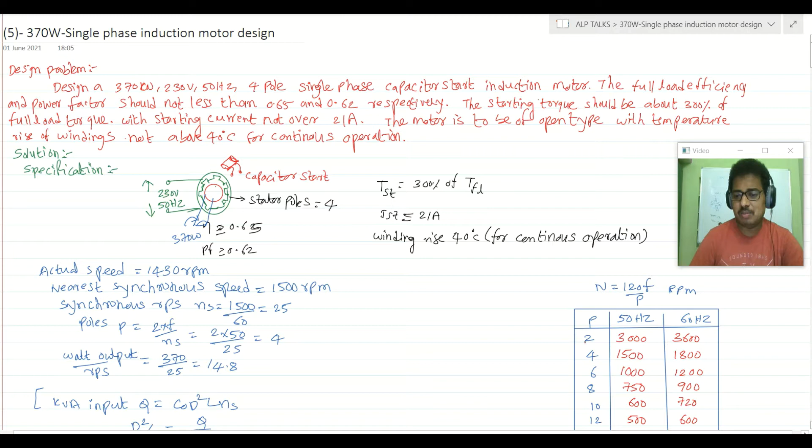For example, if it is a 2-pole machine at 50 hertz, we will have 3000 RPM, 1500 RPM, 1000 RPM, 750 RPM. This table goes up to 20 poles. For a 20 pole machine, this is 300 RPM for 50 hertz and 360 RPM for 60 hertz. This is the template for different speeds versus poles combination.

Here, for example, the actual speed in this case is 1430 RPM. So let's choose the nearest RPM, which is 1500 RPM for 50 hertz and for this 4-pole machine. So this is the actual speed, and the nearest synchronous speed is 1500 RPM.

So let's calculate RPS, synchronous speed in rotations per second. We will say small ns equals 1500 by 60, that will be 25. Now let's calculate number of poles. Number of poles will be 4 in this case.

So we are going to calculate one factor, the ratio of output by speed. For 370 watts output, if it is rotating at 25 RPS, then the factor is 14.8.

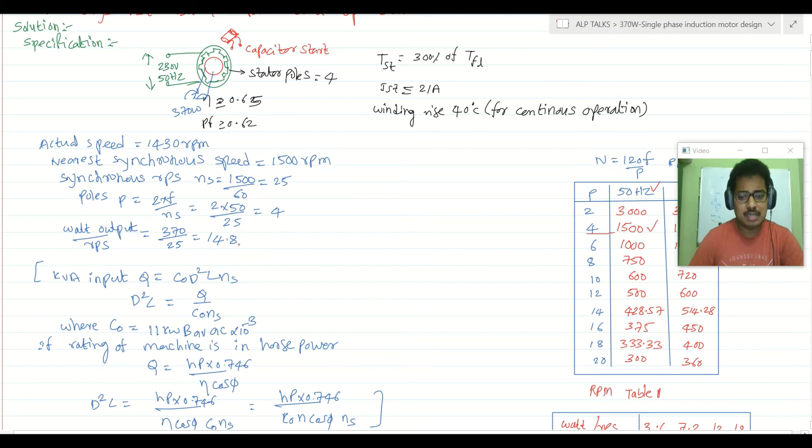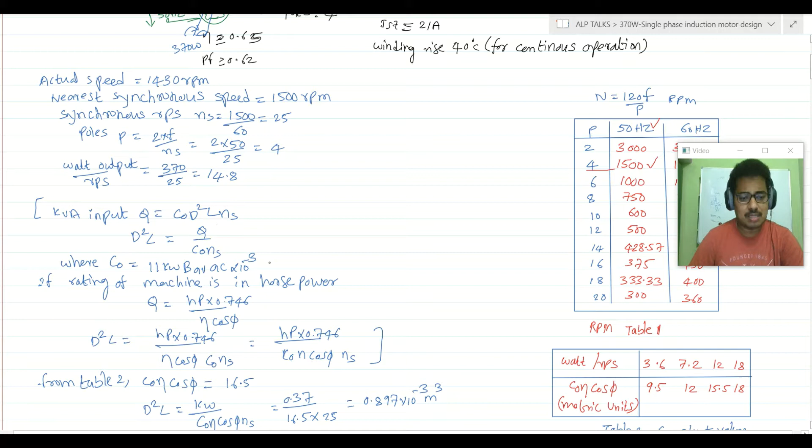So for kVA input, we have some basic formula. I am just deriving one formula here, that is Q is nothing but C naught D square L into Ns. So let's calculate D square L, Q by C naught Ns.

Here C naught is nothing but 11 kW B average AC into 10 power minus 3. This is the basic formula we have. If rating of machine is given in horsepower, we should consider Q as horsepower into 0.746 by efficiency into cos phi.

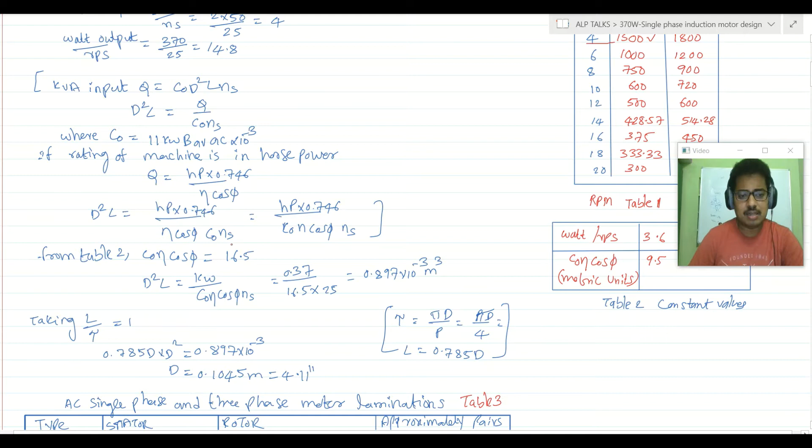So let's substitute everything in D square L. D square L equal to HP into 0.746 by eta cos phi C naught Ns. So this is the thing.

So we have one table here, table 2. In this table, watts per RPS, if it is 3.6, the factor is 9.5; 7.2 means 12; 12 means 15.5; 18 means 18. This is one table we have.

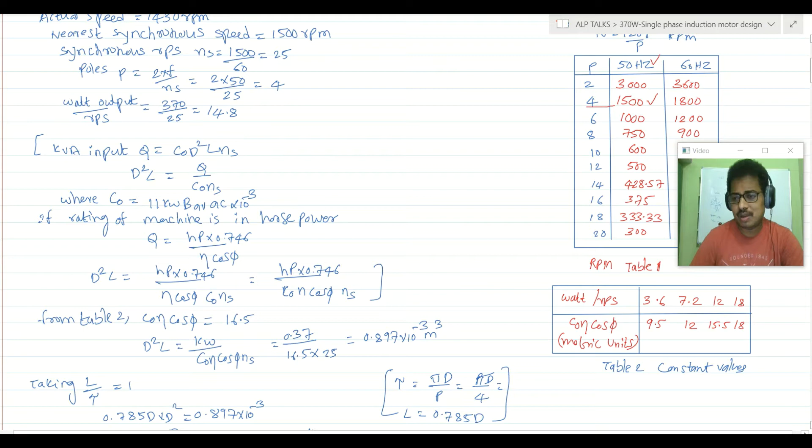From that table, the C naught efficiency cos phi value we got as 16.5. So D square L is nothing but, let's calculate this. We know 0.37, just substitute 16.5, RPS is 25. So we got this value.

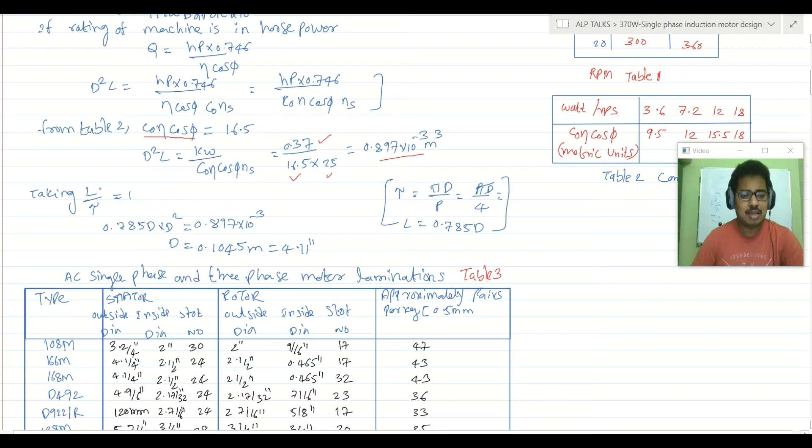So let's take length by the pole pitch tau as 1. So we can get D as 0.1045 meter, that is 4.11 inch.

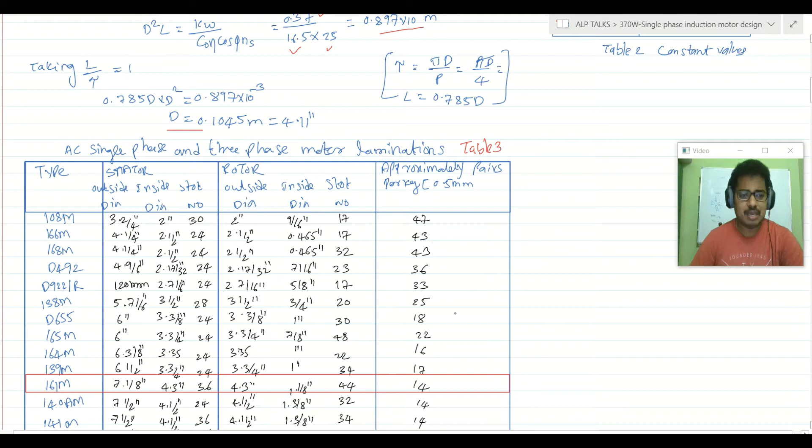So we got here 4.11. In this table, the closest one is this one, 161M. So we chose this. For this, 4.3 is the inside dia and 7, 1 by 8 inch, everything will be in imperial units in inches. This is outer dia. We have 36 slots in the stator, and rotor is also similar way.

We just ignored the air gap here, but of course air gap is there. That will be very small, 0.5 mm, something like that. So for consideration, we just took the same value for rotor also.

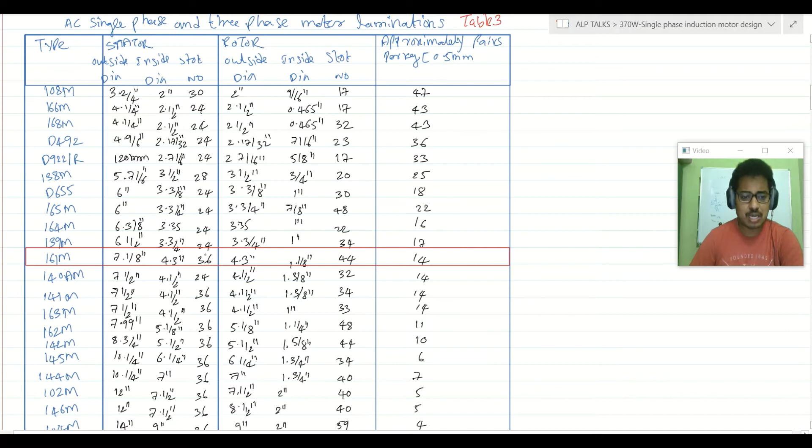Here inside dia is 1 by 8 and we have more slots here in the rotor, 44 slots. So 36 and 44 are the slots now, and 14 is the weight. So from this table we chose the 4.3 inch stator inner diameter, that is 161M, that is the model now. So what is the length of the core?

What is the stator bore? 4.3 inches is nothing but 109 mm if we convert into mm. Just substitute in the above equation. L is nothing but 75 mm. So we got 109 mm diameter of stator, and this is of 75 mm length. So this is a very small AC motor.

We have some standard template for the stator laminations also, you can see it here. The entire stator is 0.75 inch height and 0.158 inch width, and 4.3 is the diameter. So this is what the details show.

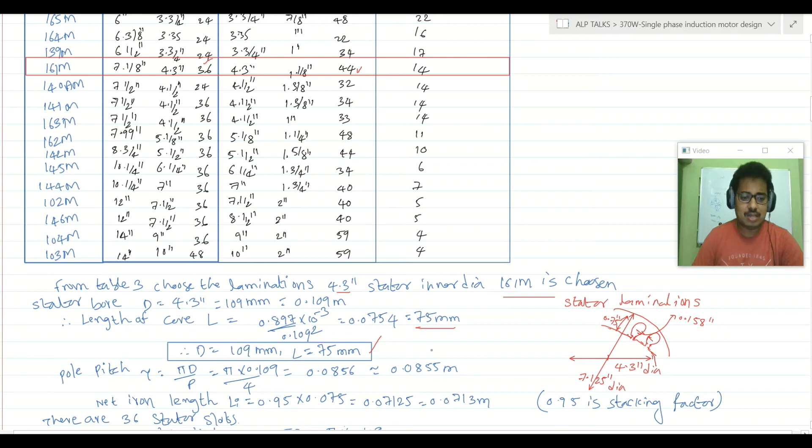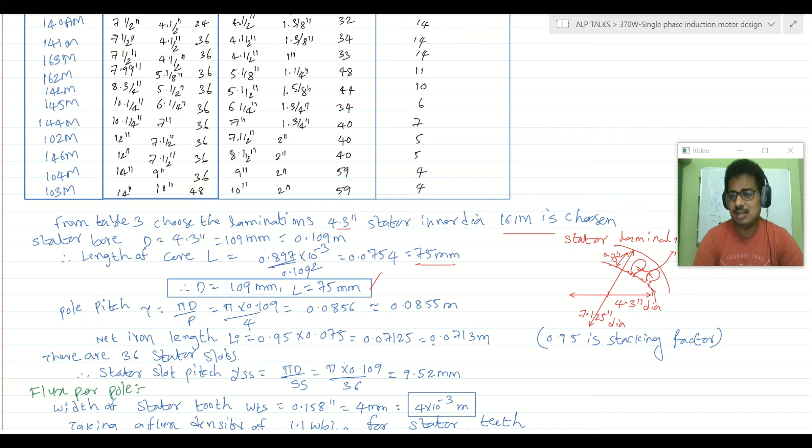In small machines, the approach is different compared to bigger machines. In bigger motors, for example 100 kilowatt range motors, we start everything with D and L, which we calculate ourselves. We don't follow a standard template there. But here, calculation of slots and all is very difficult. Up to D and L is okay, but after that we can't calculate small slot dimensions. So what we use is a standard available nearest frame, motor frame, stator frame and rotor frame.

Based on our rating, for example 370 watts, we check how much current there is, how many turns are required, and whether we are able to provide the number of turns and the conductor cross section in the slot or not. That's what we should do for the smaller machines.

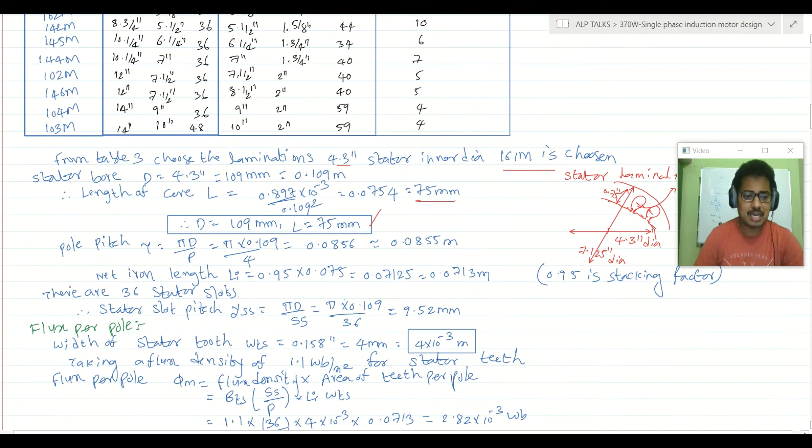Let's calculate pole pitch here. Tau is nothing but pi into diameter by number of poles, pi into 109 by 4. So we got 0.0855. This is the pole pitch, and net iron length - we chose the stacking factor as 0.95, so we get 0.0713, that is nothing but 71 mm.

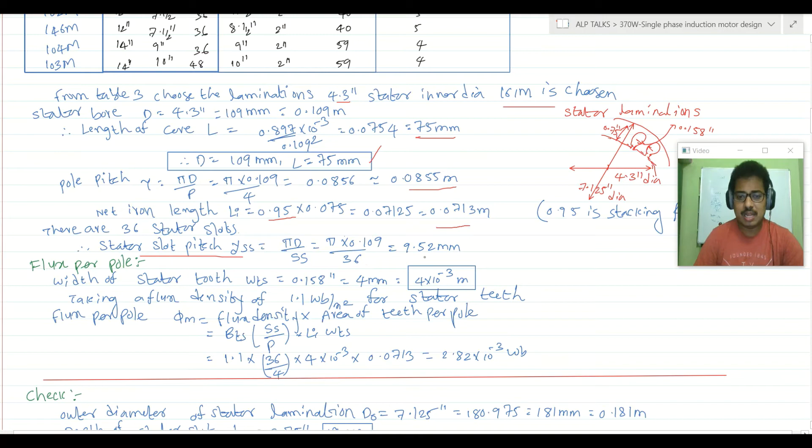There are 36 slots in the stator that we already considered. So stator slot pitch is nothing but pi d by Ss, pi into 109 by 36, we got 9.52 mm.

Let's calculate flux per pole, one of the main parameters. Width of stator tooth is already 4 mm from that existing template. Let's take flux density in the stator teeth as 1.1. So let's calculate flux now - flux is nothing but B into A, flux density into area. Flux density we chose as 1.1.

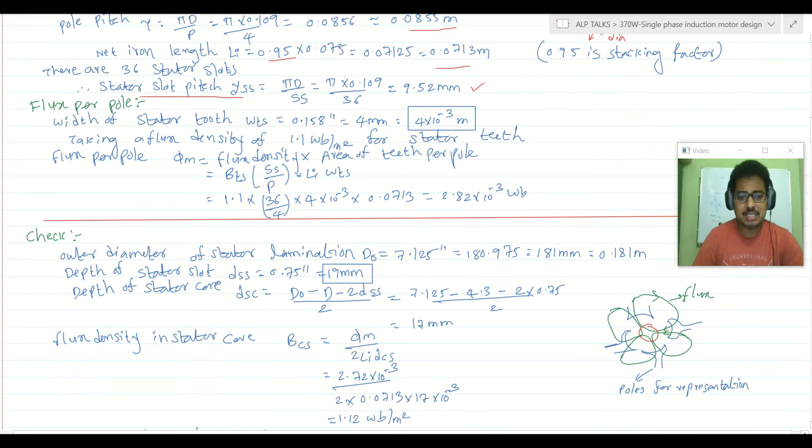The area is nothing but 36, which is the total stator slots, and number of poles 4. 36 by 4 gives total slots per pole, and each slot width is 4 into 10 power minus 3, and this is the net iron length for us. So we got 2.82 milliweber as the flux now.

Let's check whether this flux is okay or not. So this green color one - the red color inside is the rotor, and this one is the stator. The flux pattern is like this, you can see it here. So 4 loops are there.

Outer diameter of stator lamination is nothing but D0, 7.125 inch, that is 181 mm, and depth of stator is 0.75, that is 19 mm. The depth of stator core DSC we can use this formula, and we will get this value as 17 mm.

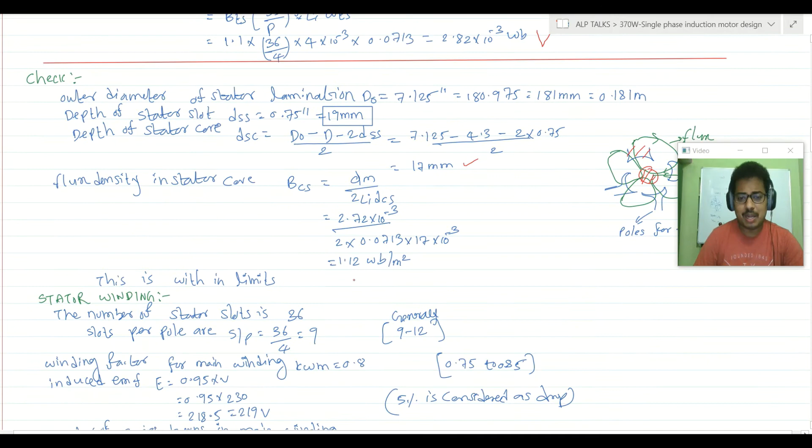Now let's calculate flux density in the stator core - that is nothing but flux density is flux by area. Here area is 2 into Li into dCs. So we got 1.12 Weber per meter square. This is good, well within limit, up to 2.2 is the final value, but we should allow for overflux, and stator teeth thickness and width also not uniform, so we should consider almost a lower value.

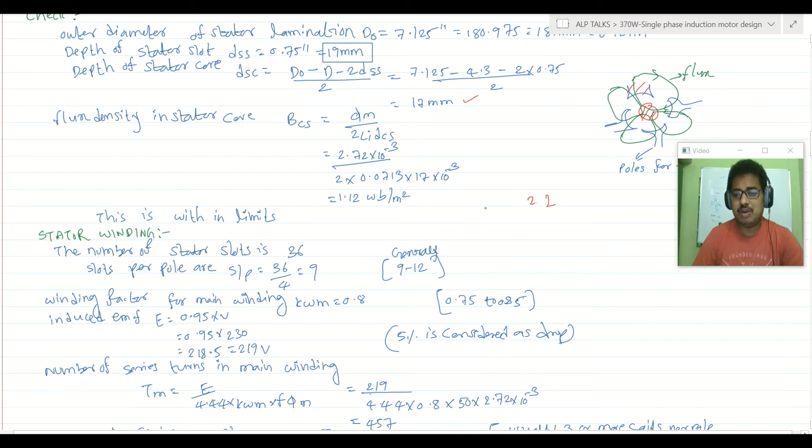So, stator winding. Next we look at how to design stator winding. The number of stator slots we have chosen is 36, that is the standard number, and slots per pole are 36 by 4, so we get 9 slots per pole. 1, 2, 3, 4, 5, 6, 7, 8, 9 - so this is one pole, this many slots we have under one pole. Generally, the slots per pole can be 9 to 12.

Winding factor for main winding - let's take winding factor as 0.8, generally it can be 0.75 to 0.85. For induced EMF, let's consider 5% for a drop, so our remaining voltage is 95%. So 95% of 230 volts, so 219 volts is getting induced.

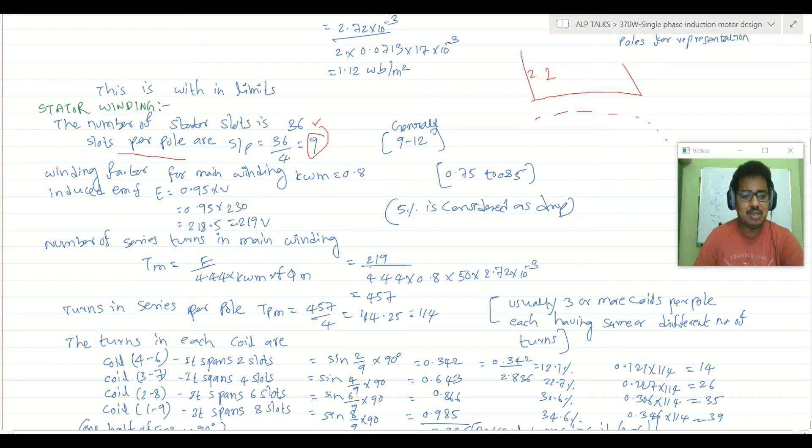Let's calculate the number of series turns in main winding - how much is required. That is nothing but Tm equals E by 4.44 into kwm into f into phi m.

Here the voltage is 219 volts, 4.44, and we have 0.8 as the winding factor or distribution factor. We have 50 Hz frequency and 2.72 milliwebers of flux. So number of series turns is nothing but 457. We have 4 poles, so 457 divided by 4 is nothing but 114.

We usually get 3 or more coils per pole, each having same or different number of turns. Here we have the turns in each coil: 4 to 6, 3 to 7, 2 to 8, and 1 to 9. So coil 1 to 9, this is 1 and this is 9.

One coil, 1 to 9, will span 8 slots. 2 to 8 will span 6 slots. 3 to 7, 4 slots. 4 to 6, 2 slots. So let's calculate sine of 2 by 9, 4 by 9, 6 by 9, 8 by 9, like that, multiplied by 90 degrees, because under one pole it is 90 degrees only. So you get these values.

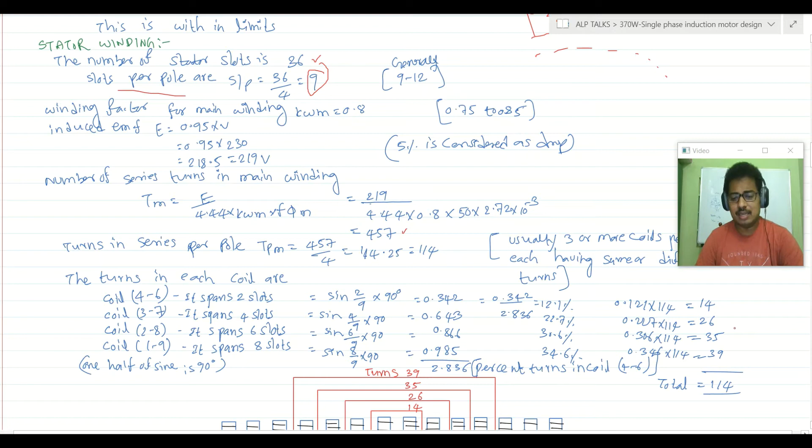If we add everything, it comes to 2.836, and considering the percentage of everything: 12%, 22%, 30%, 34%, like that. Now let's calculate the turns. Whatever total turns under one pole there is, that's 114. Among 114, there is a different consideration again: 14 turns, 26 turns, 35 turns, and 39 turns. Total is 114.

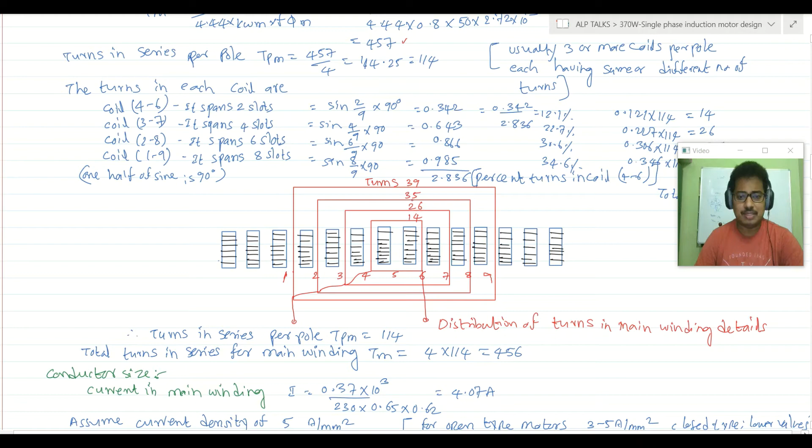So this is the distance between the distribution of turns in the main winding, how turns were distributed. You can see here, one turn, one slot we left here, that is for consideration of auxiliary winding, let's say. So we have 14 turns, 26 turns, 35 turns, and 39 turns, that is the consideration now. So total turns in series for main winding is 4 into 114, that is 456. There should be a multiple of number of poles.

Let's calculate conductor size now. For conductor size we need the current, how much current the winding has to carry. So 370 watts divided by 230 volts and 0.65 efficiency, and 0.62 power factor. So the current is 4.07 amperes. This much current will flow in the circuit.

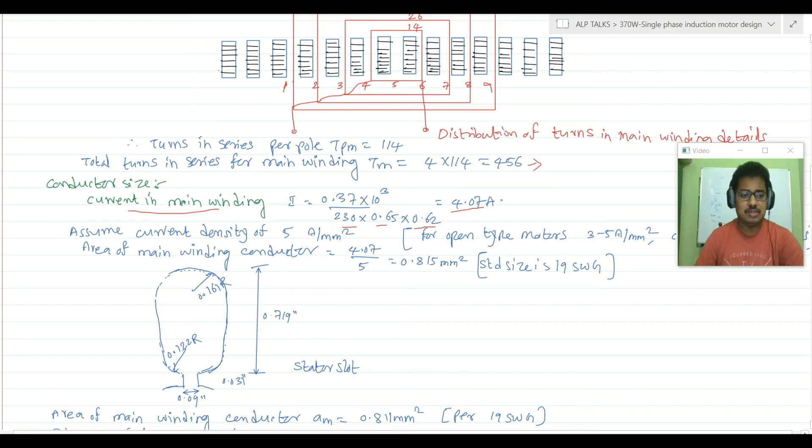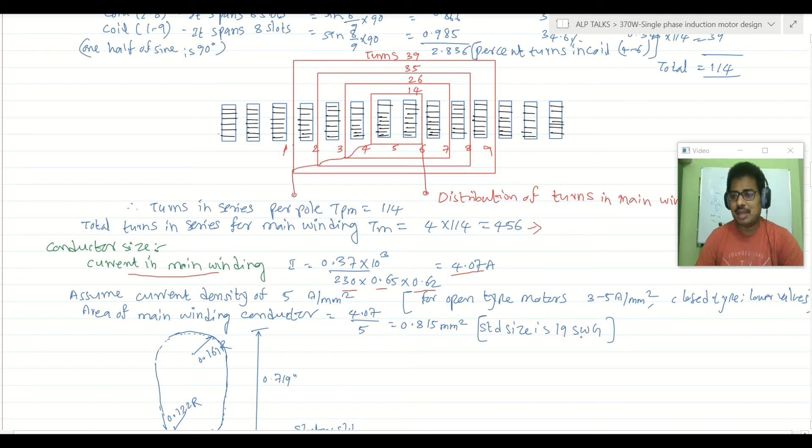Assume a current density of 5, generally 3 to 5 we can choose. Let's choose 5 as current density. So area of main winding is nothing but 4.07 by 5, which gives us 0.815. For this 0.815 mm square, the standard size is 19 standard wire gauge. You can check standard wire gauge in Wikipedia. So this is 19.

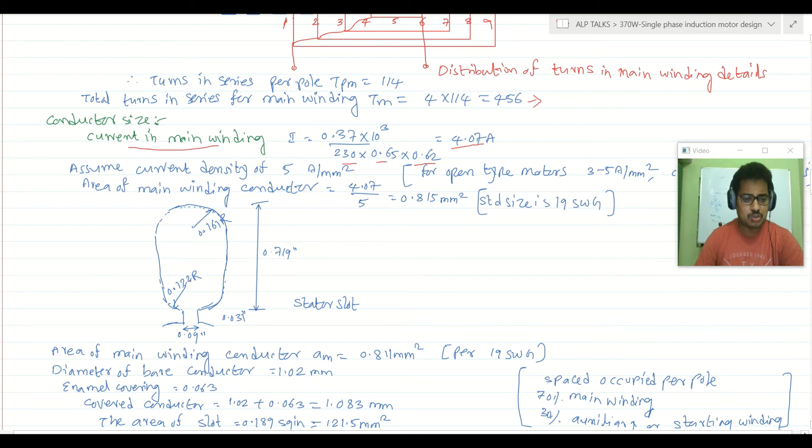So these are the slot dimensions for that standard stator frame. 0.719 is the height, 031 this figure, 091 this figure, and 122 this is the radius here, 161 radius at the edge.

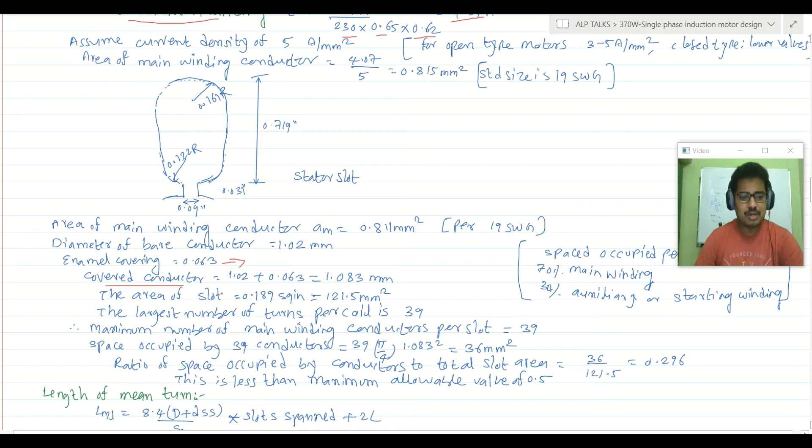So area of main winding conductor for this standard wire gauge, main area is 0.811, and diameter of bare conductor is 1.02 mm. Let's take covering of 0.063. So the covered conductor is nothing but 1.083 mm.

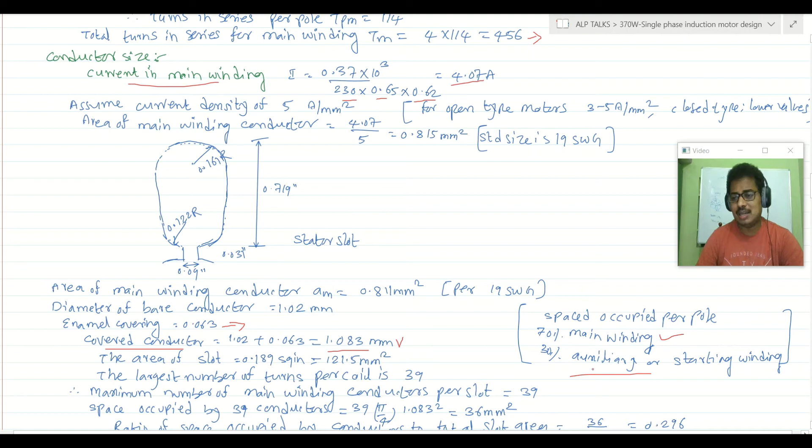Generally, space occupied per pole is 70% by main winding and 30% by auxiliary or starting winding. And here the area of slot is nothing but 0.189 square inch for the entire area. That is nothing but 121.5 mm square.

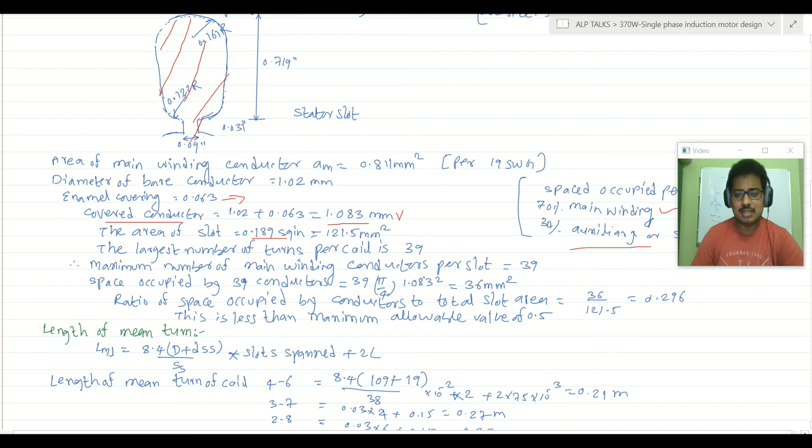The largest number of turns we have is 39, which is the maximum number of turns per slot. Let's calculate the area for this 39. We got 36 mm square. That is the area we need.

Let's calculate the space factor now. 36 mm square is the area the conductor occupies, but the total available area is 121, giving 0.296. It means we still have more space, more space for insulation, more space for empty space, more space to wind easily. This should generally be less than 0.5. If it is less than 0.5, it means it is okay, the winders can easily wind the windings, they can easily make the stator windings. Otherwise it is very difficult for them, they have to try a lot with the hammer, they have to insert all the insulations very hard. That is very difficult, so manpower cost is very high.

So let's calculate the length of the mean turn now.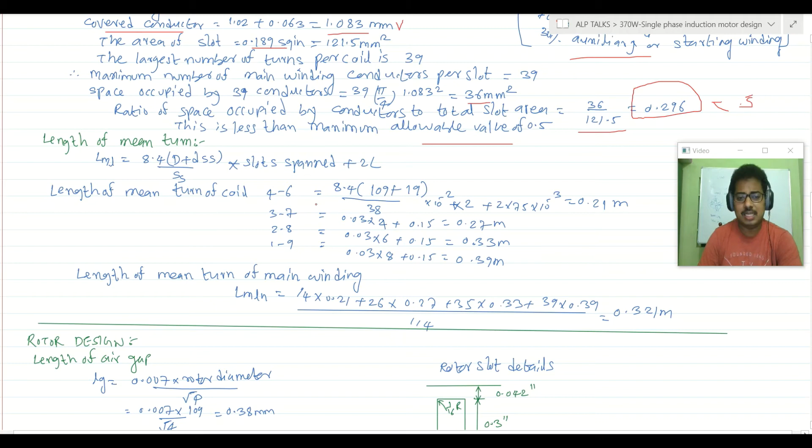We have the basic formula here: 8.4 into d plus dss by ss into slot span plus 2l. This way we can calculate the turns for all the slots. So let's consider mean length. 14 turns are there, they are of 0.21; 26 turns are there, they are of 0.27; 35 turns are there, of 0.33. So finally we got 0.321, that is the mean length for us.

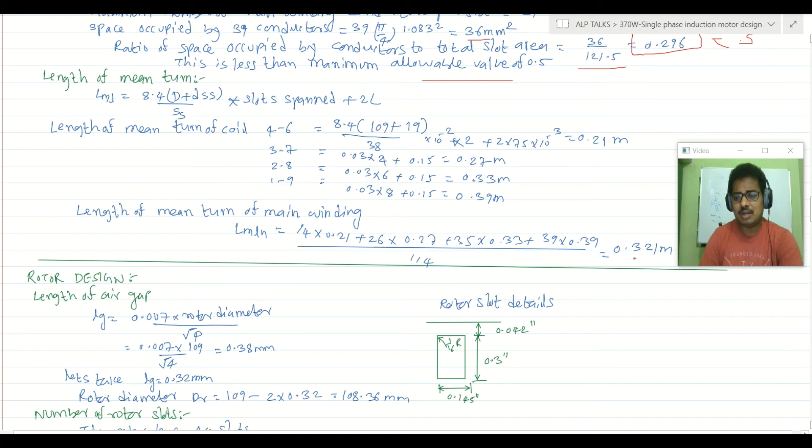Let's go to the rotor and design the rotor also. Before the rotor we have an air gap. What is the length of the air gap? That length is nothing but Lg. Generally we say rotor diameter by root P. This is one basic formula we have. 0.007 into 109 by root 4, where this is the number of poles, not pi, number of poles. So we got 0.38 mm, very less, right?

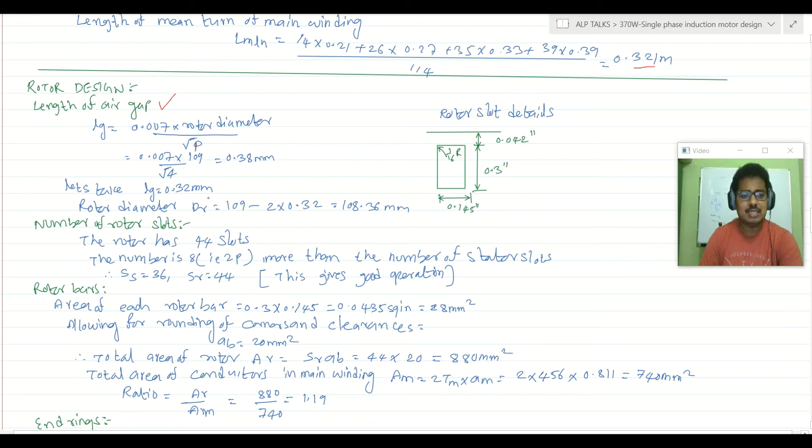So let's take it as 0.32 mm. So we have a rotor diameter of 109 into 109 minus 2 into 0.32, that is 108.36. And this is the rotor dimensions here, you can see: 0.042 and 0.145, 0.3 inch. This is the rotor.

Number of rotor slots: per the standard template or standard frame, we have a number of rotor slots as 44. This number should be two times, I mean a multiple of the pair of poles we have, that is 8. It is more than 8, 36 plus 8. So this gives a good operation actually.

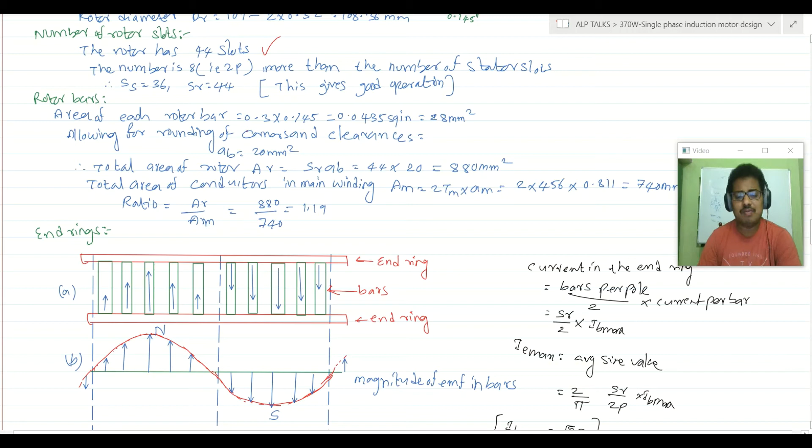And rotor bars. Now let's calculate the area of each rotor bar. So we have 0.3 and 0.145, giving 28 mm square. Allowing for rounding of corners and all, let's consider area as 20 mm square. The area of rotor,

that is nothing but SR into AB. We have 44 slots, each with 20. So we got 880 mm square. That is what the conductor area we are considering.

The area of conductor in the main winding is nothing but 2 times the turns. So 2 into 456 into 0.811, that is 740. So here the factor is 1.19, that is area of rotor AR by AM in main winding. So this is good. Generally the rotor will have more copper area compared to the main winding stator copper area.

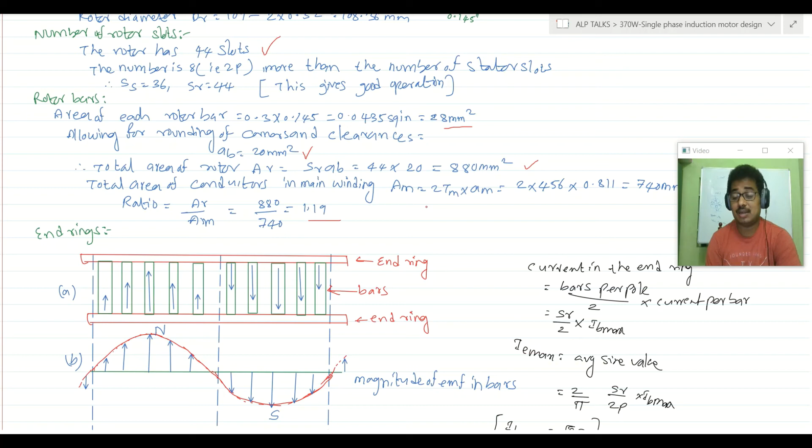Okay, here I have some end ring concept. So this is the end ring, and we have a number of bars here. Current is flowing in one direction under one pole, and another direction under another pole, north pole and south pole. This is the current loops that's actually flowing. So we get the EMF, current in bars and current in end ring.

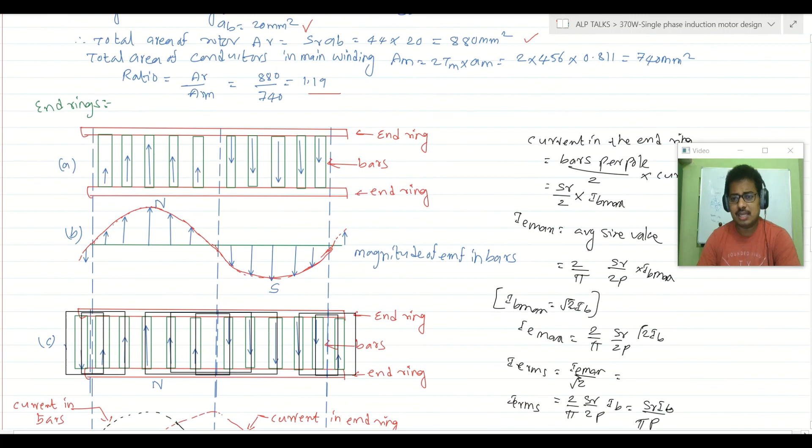The end ring is a little bit different. So here I derived one basic formula: current in end ring is nothing but bars per pole into current per bar, by 2. You can just go through this. Finally we get 0.32 into AR by P, this is the formula we have. So area of the end ring is 0.32 into AR by P, that is 70.5 mm square.

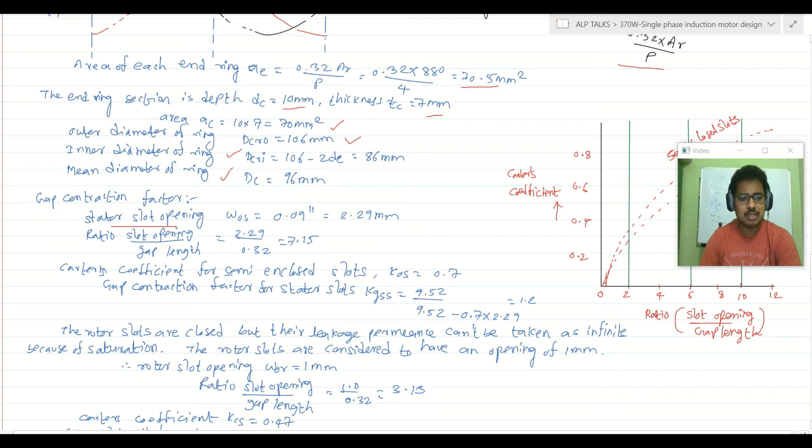End ring thickness we assumed as 10 and 7, so 70 mm square area. Let's calculate the outer diameter of end ring, inner diameter of end ring, mean diameter of end ring. So we have a gap contraction factor. For the slot opening, we have some basic formulas here.

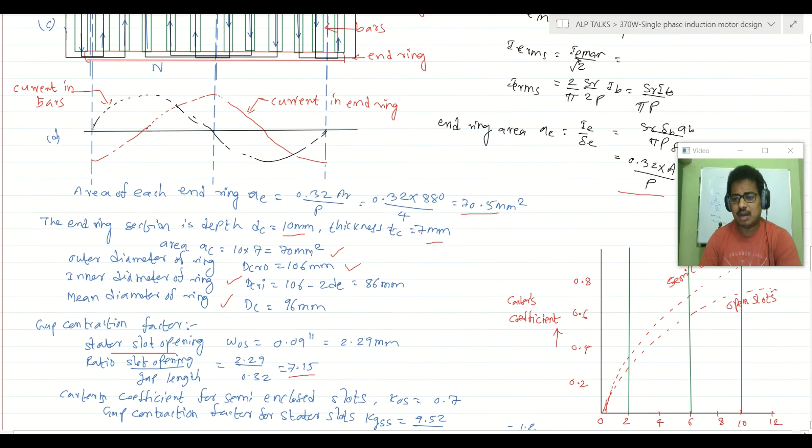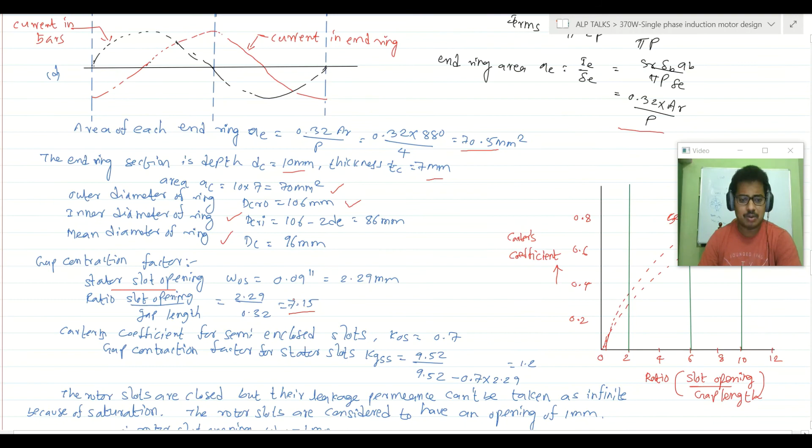The slot opening is 2.29 mm, and slot opening to gap length ratio is 7.15. We have one Carter's coefficient that gives the air gap related parameter for us. So for semi enclosed slots, for this ratio of 7.15, the Carter coefficient is 0.7. So the gap contraction factor we can calculate: kgss is 9.52 by 9.52 minus 0.7 into 2.29, that is 1.2.

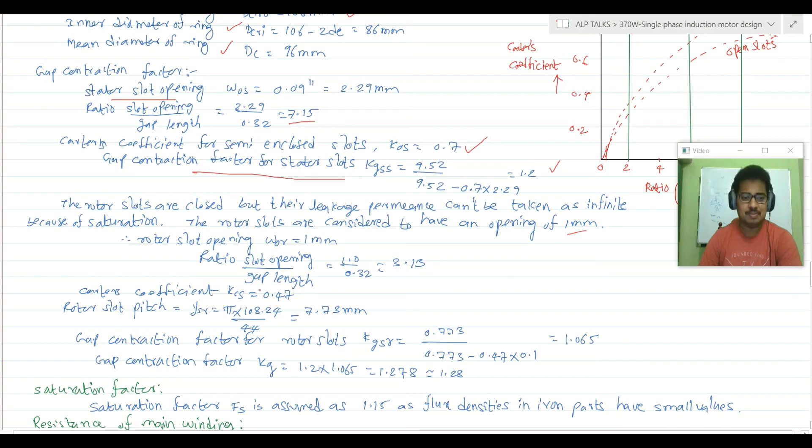And similarly, the rotor slots are closed, but the leakage permeance can't be taken as infinite because of saturation. The rotor slots are considered to have an opening of at least 1 mm. So 1 mm by 0.32, that is 3.13. Carter coefficient for 3.13 is 0.47.

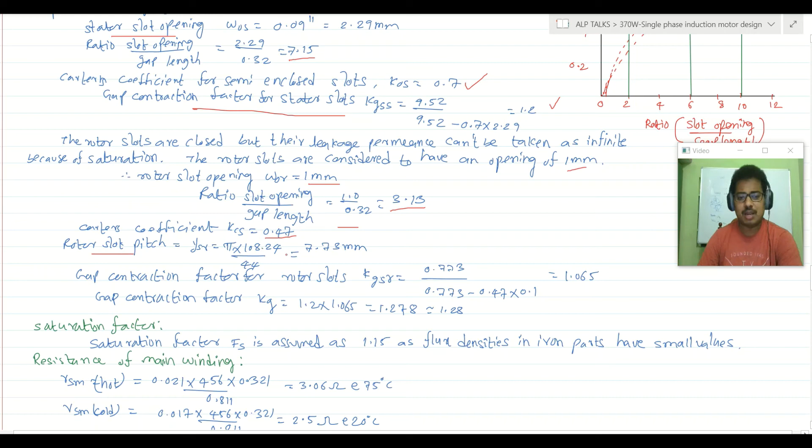And let's calculate the rotor slot pitch also, YSR. So pi into 108.24 by 44 slots, we get almost 7.73 mm. Here the gap contraction factor is 1.28 now finally. So let's calculate a saturation factor, that is generally assumed as 1.15.

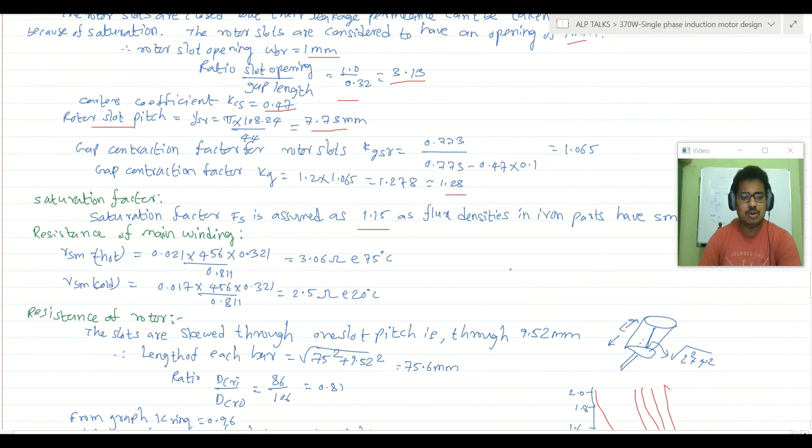Let's calculate the resistance of the main winding, that is rho L by A. Rho here is 0.021. We have 456 turns, each of 0.321 length, and area is 0.811. So we got 3.06 ohms.

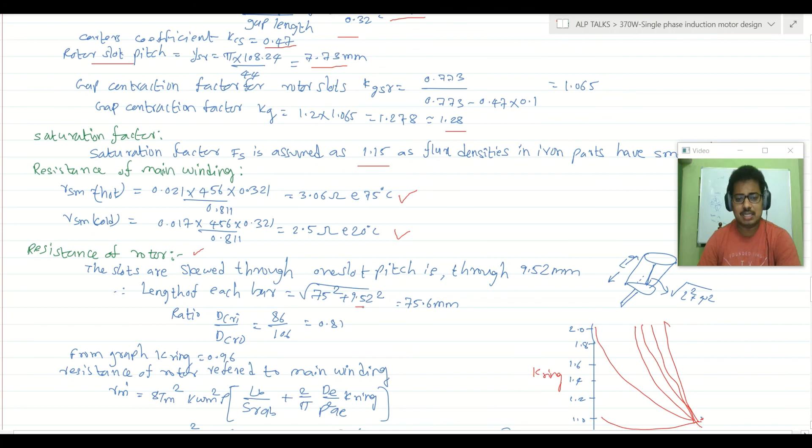This is at 75 degrees centigrade, and similarly we can calculate for 20 degrees also, because that's what we generally measure. Let's calculate resistance of rotor also. This is the rotor of length L, and generally the rotor is skewed a bit by 1 slot pitch. So let's calculate rotor length also. Even though it is 75, since it is skewed by 1 slot of 9.52 mm, it becomes 75.6.

So here also let's calculate the ratio. We have one ring coefficient ratio, K ring we will call it, and from this graph we can get that value. Finally, the resistance of rotor referred to the main winding - this is one basic formula. In a separate video I will explain how we got this formula.

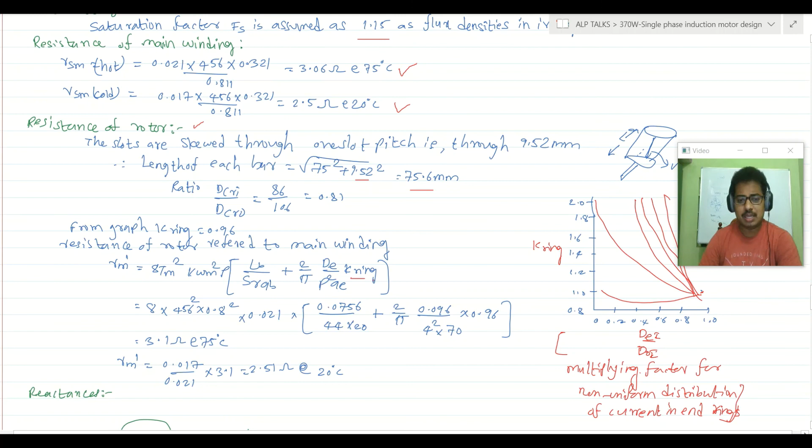So rotor resistance referred to stator side, main side, that is 8 Tm square Kwm square rho into LB by SR AB plus 2 by pi into dE by P square AE K ring. This is the one basic formula. We got this value as 3.1 ohms, and the resistance at 20 degrees centigrade we can just convert.

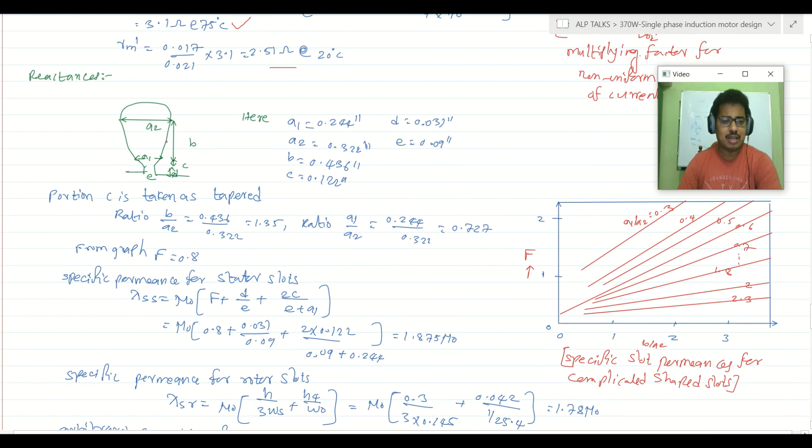Let's calculate reactance also. This reactance also plays a major role. So this is the slot actually. There are different parameters A1, C, B and E, and so these are different parameters. This portion is generally taken as a tapered C portion.

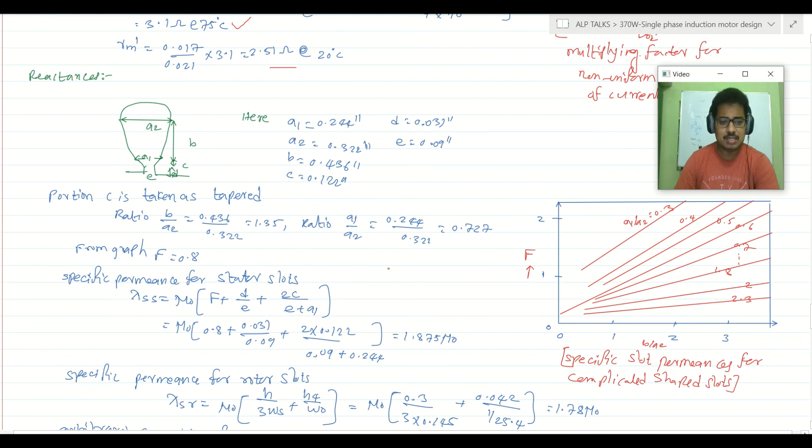So here we are calculating so many parameters, ratio B by A2, and from this graph we got the 0.8 F value. Specific permeance for stator slots, we have this basic formula: lambda SS mu naught F plus D by E plus 2C by E plus A1. This is one basic formula. So finally we got 1.875 mu naught.

And specific permeance for rotor slots also we can calculate in the similar way. Here this is also another basic formula. So arbitrary correction factor, we are calculating one factor Cx here, and Cx is 0.96 for us. And slot leakage reactance in terms of main winding, finally we got XS as 2.8 ohms.

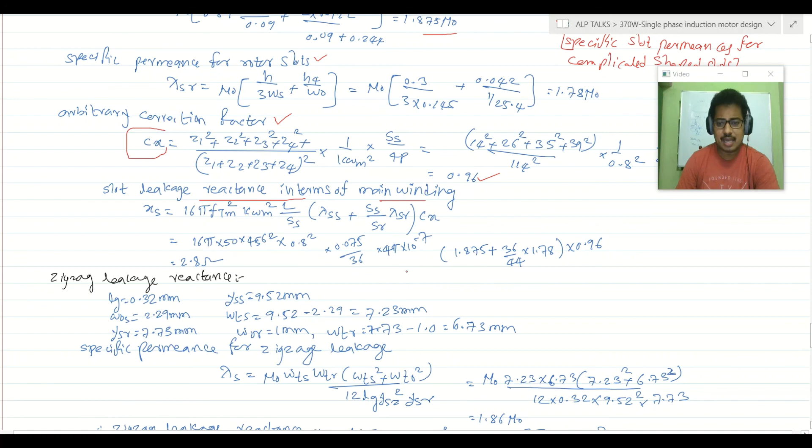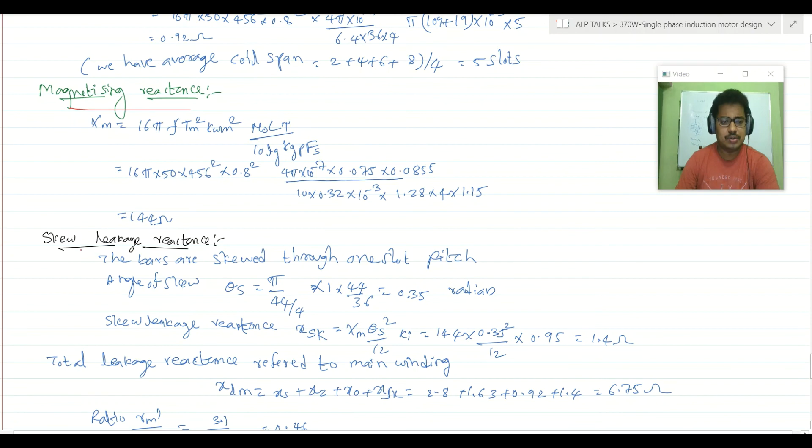Similarly we can calculate zigzag leakage reactance, overhang leakage reactance, magnetizing leakage reactance, and skew leakage reactance. By calculating all the leakage reactances, finally we can calculate total leakage reactance referred to main winding, so the main winding XLM, that is XS, XZ, X0, XSK - 6.75 ohm, that is the final value we got.

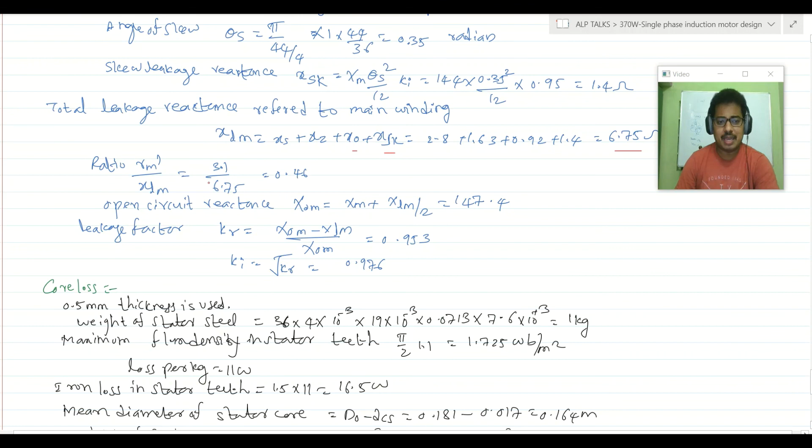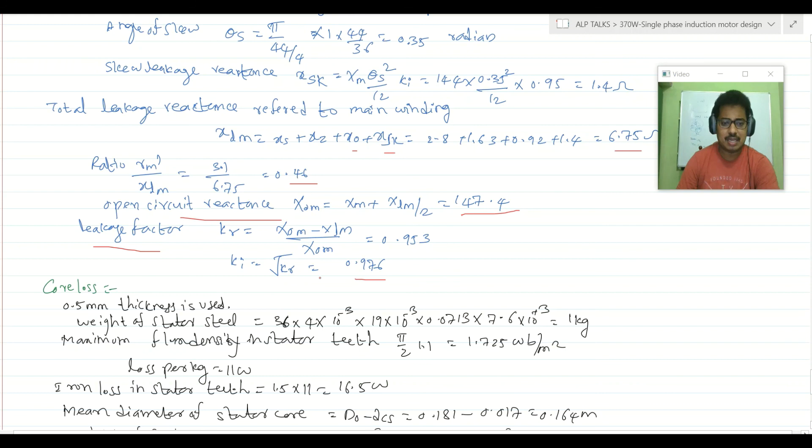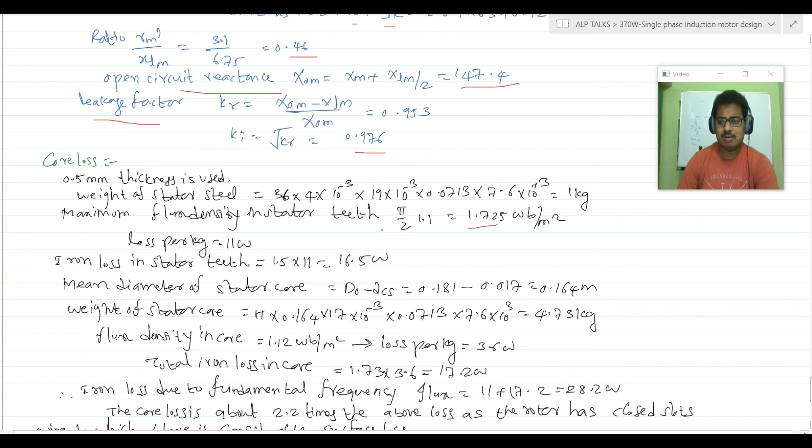Now this is of 0.5 mm core, let's calculate the weight of stator steel. This is the basic equation, we got 1 kg, and flux density is 1.725. Even though 1.1 is the average one, the maximum flux density is 1.725, so loss per kg is 11 watts. So iron loss in the stator teeth we got as 16.5 watts.

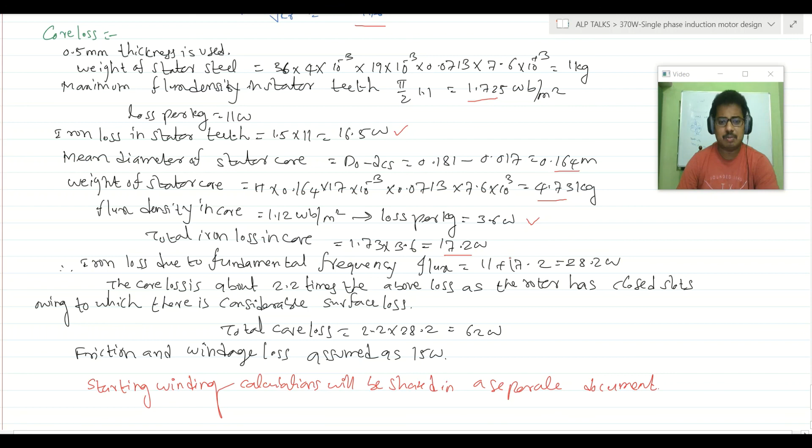Let's calculate the mean diameter of stator, so we got 0.164 m. Weight of stator core we got as 4.73 kg, and flux density in core, as per graph, gives 3.6 watts. So total we got 17.2 watts. So 17.2 plus 11, so 28.2 watts - that is the iron loss.

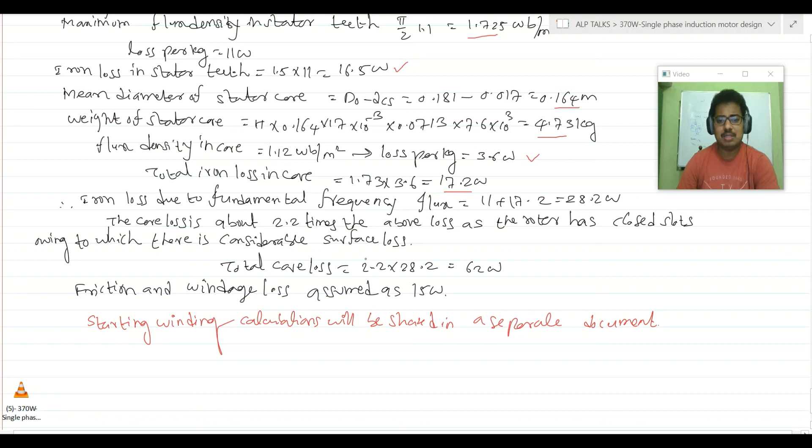Generally we will take 2.2 times the above loss, because the rotor has closed slots, owing to which there is a considerable surface loss. So friction and windage loss we assumed as 15 watts.

This is about different calculations, guys. There is still a lot of parameters to calculate - the inrush current calculation, starting current calculation, torque calculation, circuit diagrams, and starting winding calculation, because we left some space for it. There are some different parameters. All the things we will discuss in the next session.